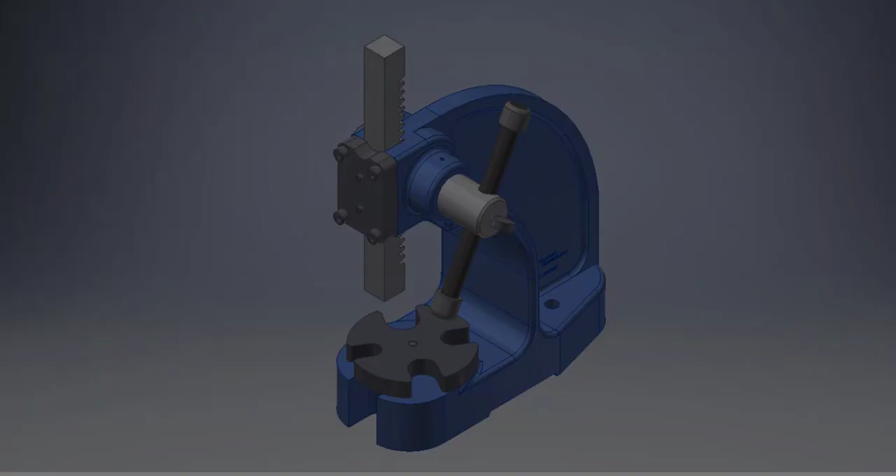In this video, I'm going to show you how to create this Arbor press assembly. I'm going to start out by going to your Canvas assignment and download these parts. Store them in your Documents folder. At the bottom is a sample of what you're going to submit to the assignment.

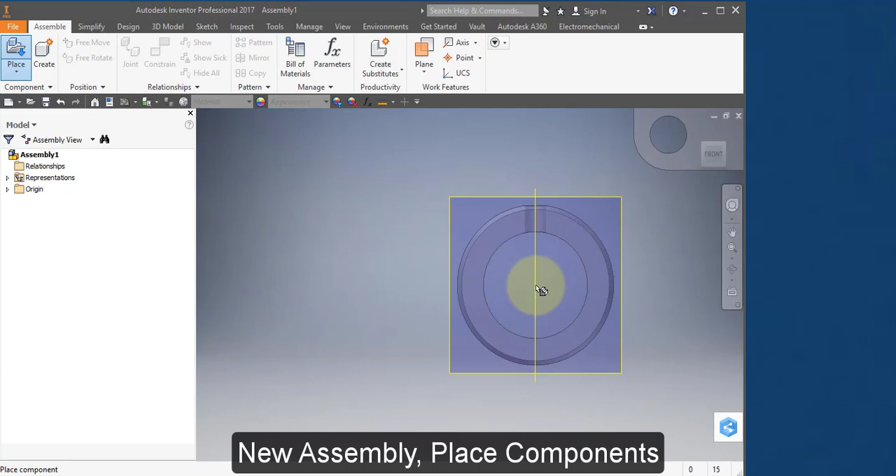Start out by creating a new assembly. Place your components. Go to the folder that you've stored the parts. You can hold your Shift key down and select multiple items. Open them. Select the location on the screen to place them. Right mouse button, OK.

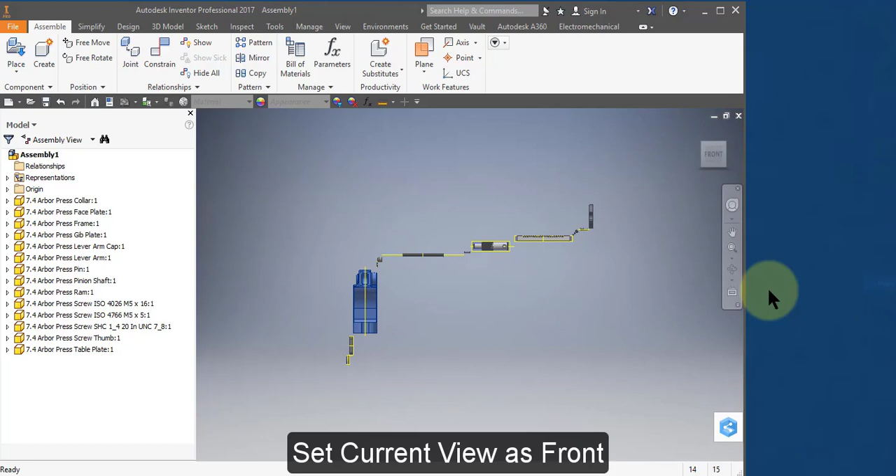Go to your front view. Rotate around such as this is your front view. Select your context menu. Right mouse button. Set current view as front. Select the frame. Hover over it. In your browser, right mouse button, Grounded, and you'll see a pin next to the part, and the frame is now grounded and can't be moved.

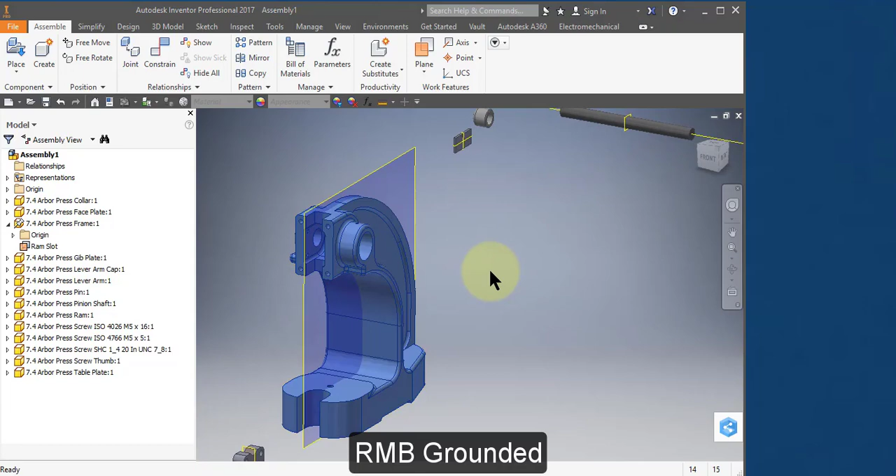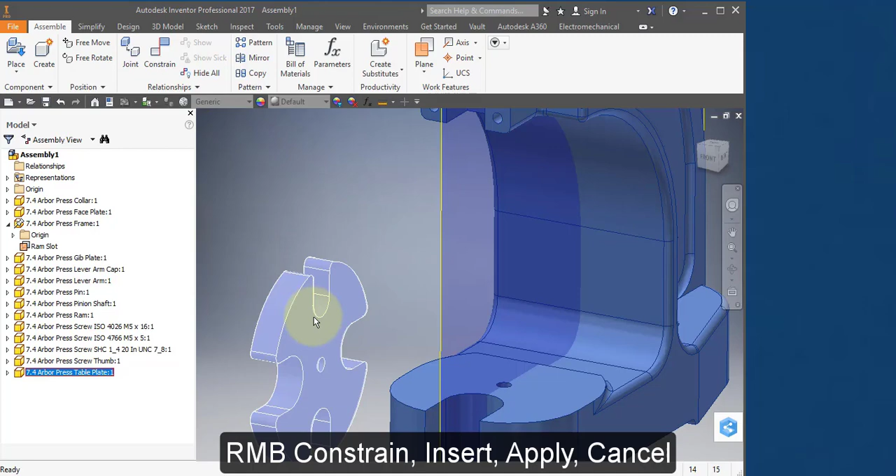Grab this plate and bring it closer to the frame. Select this part, the press table plate. Right mouse button, Constrain. Insert. Select this diameter and this diameter. Apply and cancel.

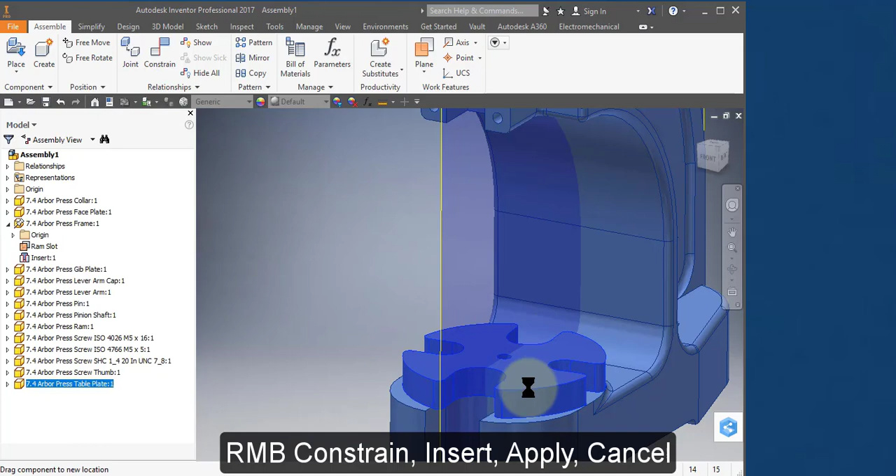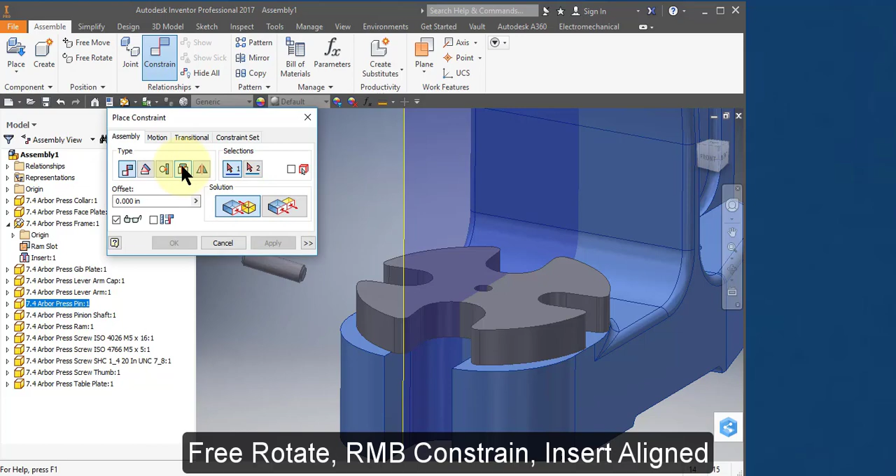Go to this part, this pin, and bring it closer to the assembly. Select the part, and then if you use free rotate, make sure it's the pin and not one of the screws. It should look like this. Select any place on the screen to let go of the part. Select the part, right mouse button, Constrain, and insert, and select this smaller diameter on the end and the hole here. Reverse the orientation by selecting here. Apply and cancel.

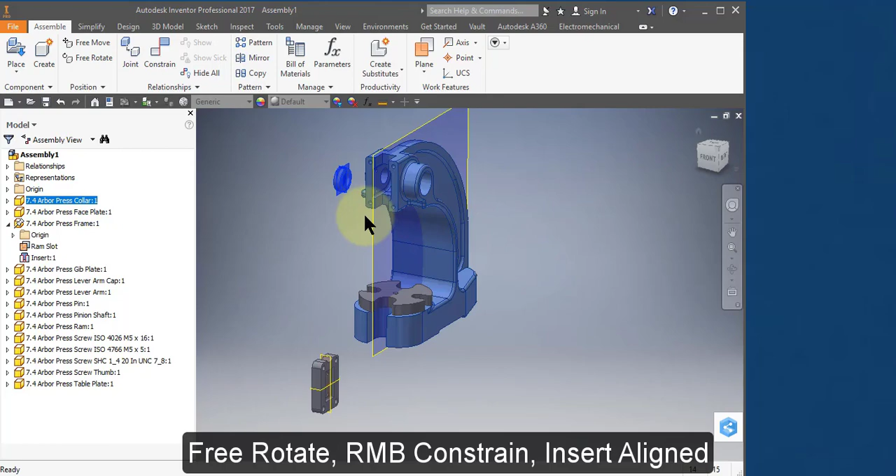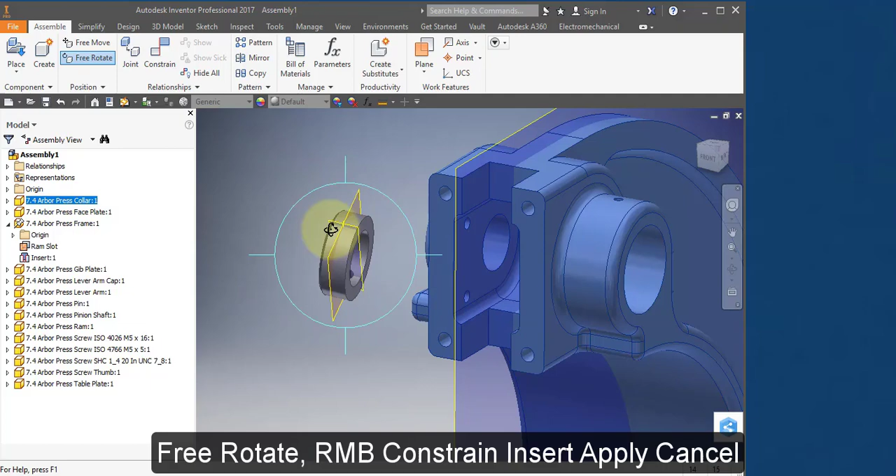Select this part and place it closer to the assembly. Select free rotate and rotate the part around. We want to orient it like this so that this surface is perfectly flat and the chamfer is on the far side. Select the part, right mouse button, Constrain, Insert, and select this diameter and this diameter. Apply and cancel.

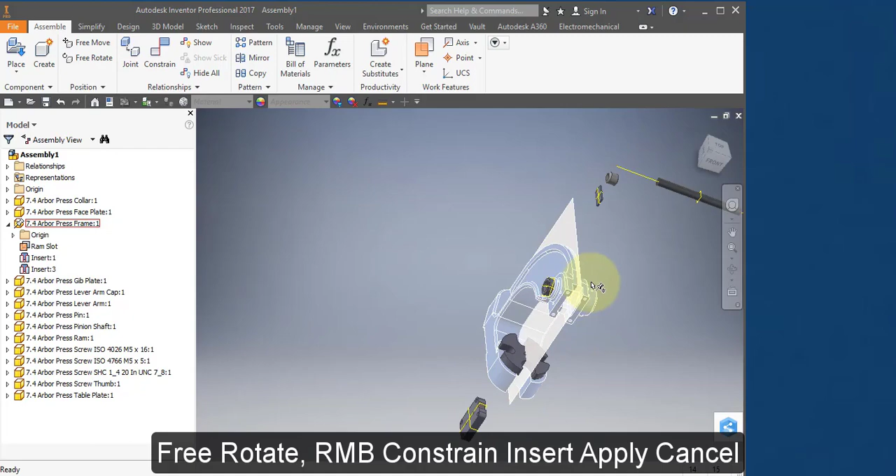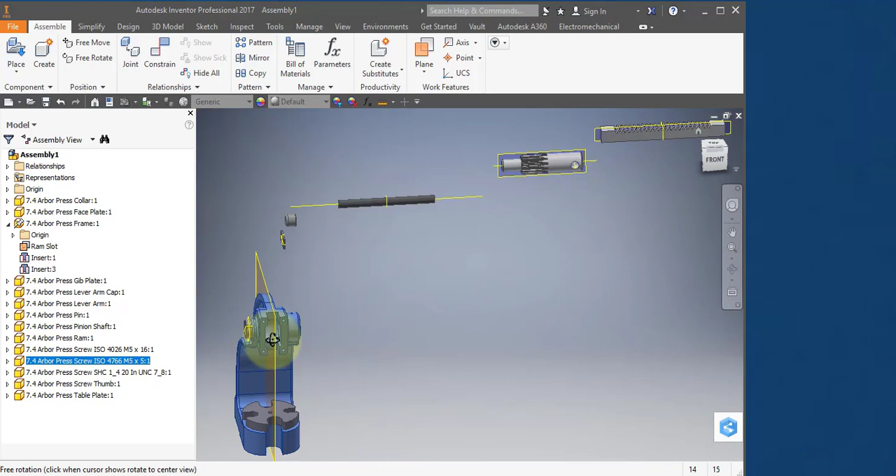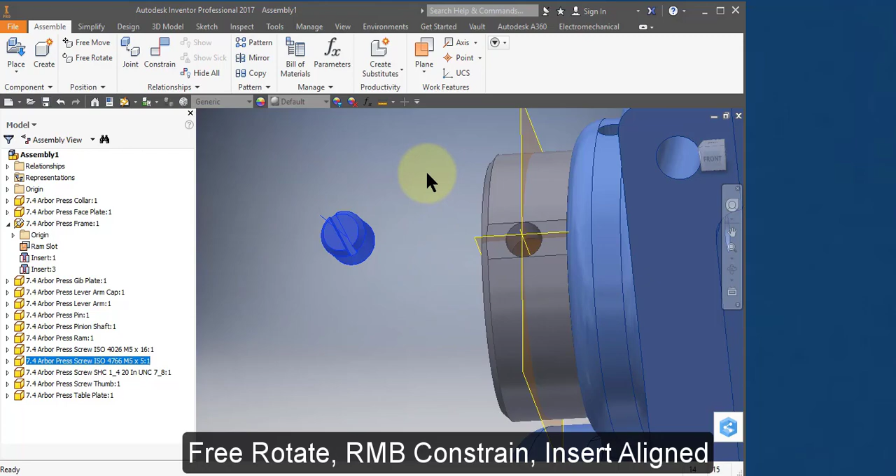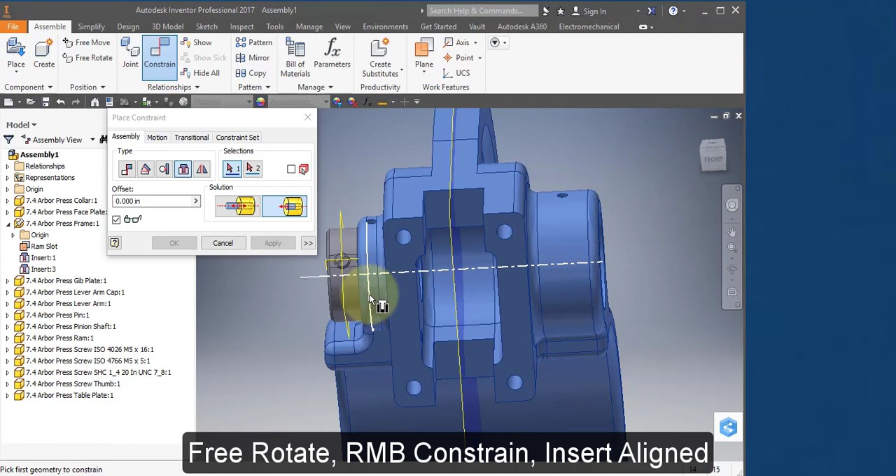Select this small part and bring it closer to the assembly. Select the part and select free rotate. Rotate the part around. Should look like this. Select, right mouse button, Constrain, Insert, and select this diameter and this diameter. Reorient the part, flip it, apply. Cancel.

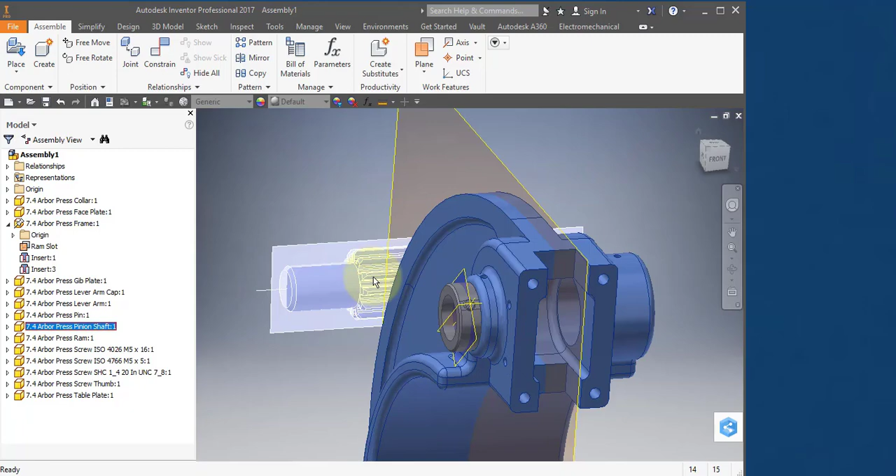Select this part and bring it closer to the assembly. Select this part, right mouse button, Constrain, and select Insert. Select this diameter and this diameter. Reverse the orientation and apply.

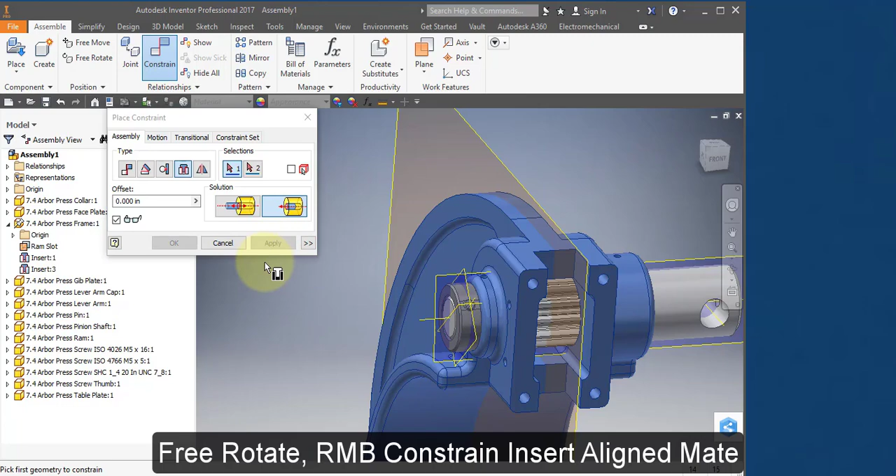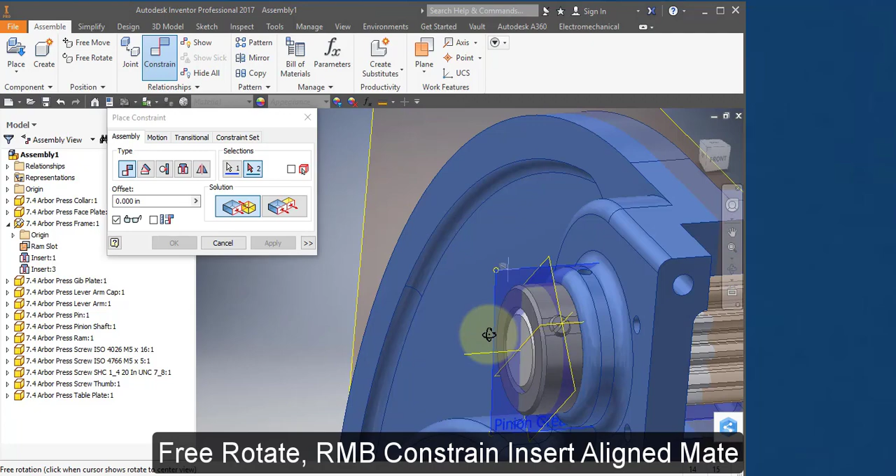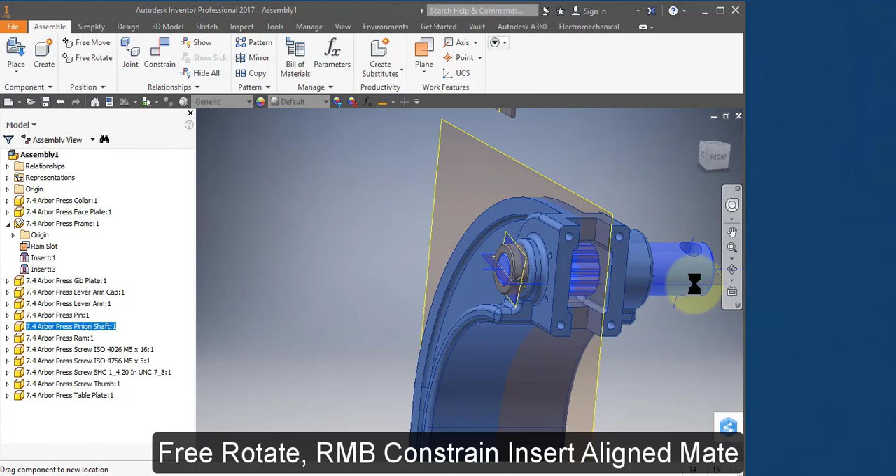Select Mate and select this work plane. It's on the pinion. And this matching work plane on the collar. And apply. And cancel. Now when you rotate the shaft, the pinion, the collar should rotate with it.

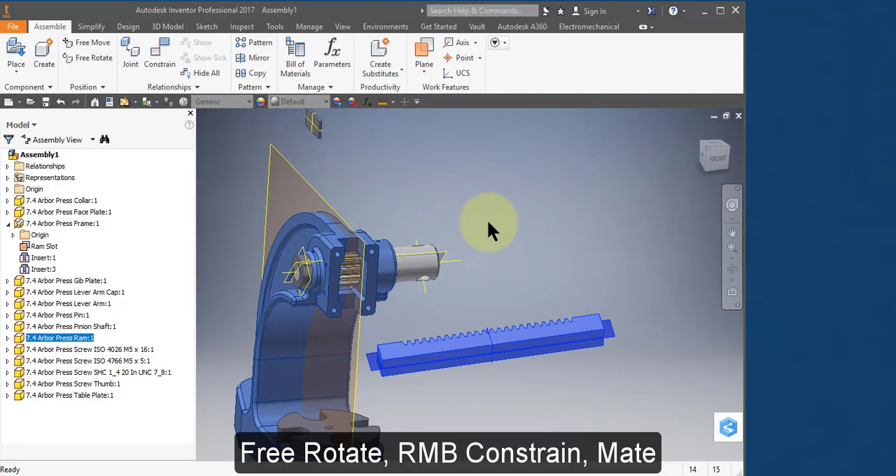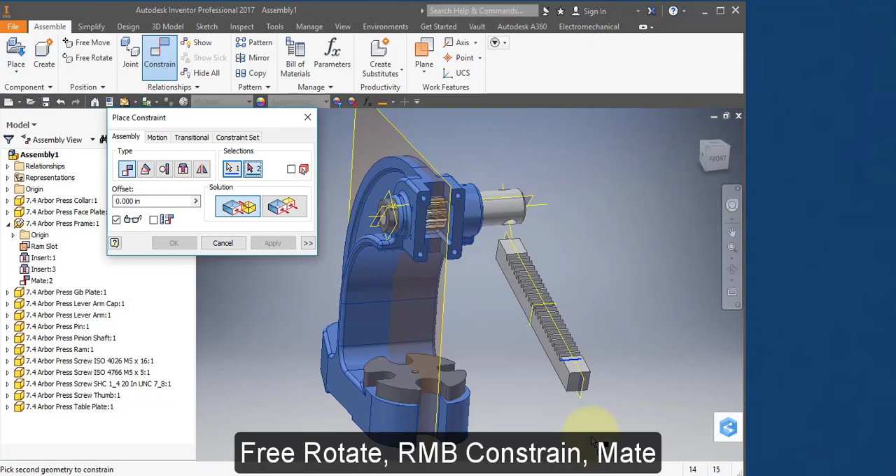Grab this part here, the ram. Select free rotate. Rotate the part around. Select Constrain. And select this work plane on the ram. And this work plane on the frame. Select Apply. And cancel.

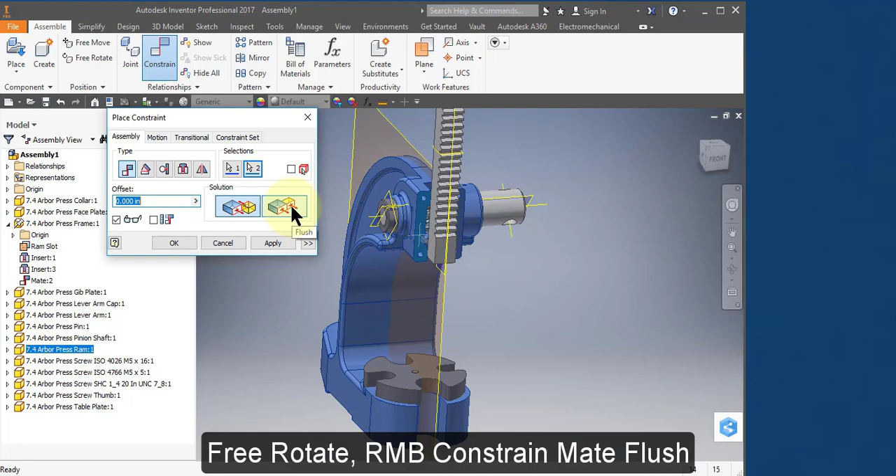Right mouse button, Constrain, and constrain this to this face. Make them flush and apply and cancel. Now you see the ram moves up and down in the slot. We'll look at my front view and then rotate around to my left side view and zoom in.

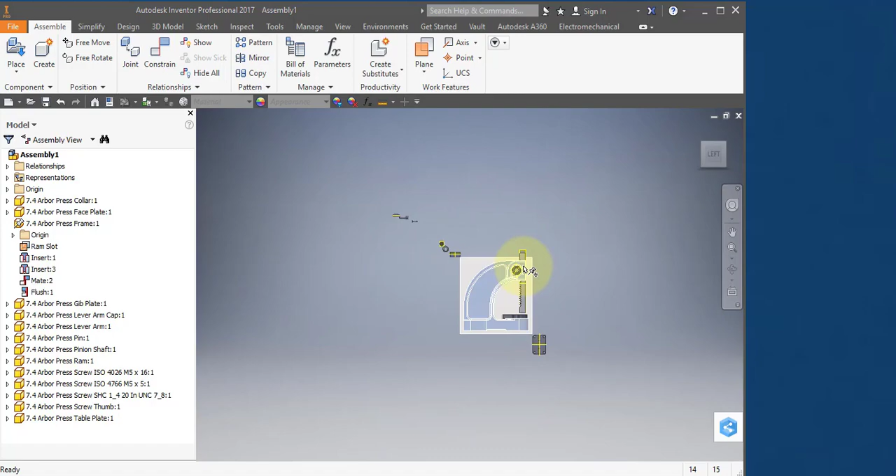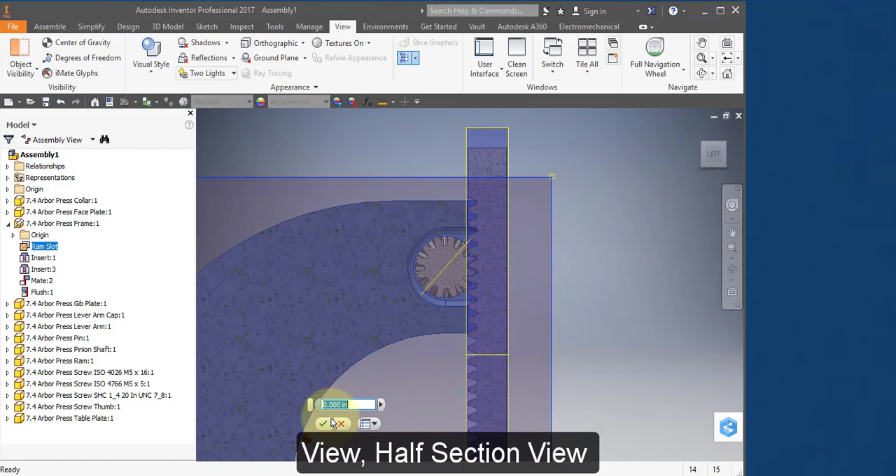I'm going to go to View, select this icon, select half section, and point to this work plane. And now I could select here, leave the offset at 0. And you can see the ram can move up and down, but it's not aligned with the gears. The gears, as a matter of fact, don't even move. I'm going to correct this so that when you move this ram, the gear rotates with it.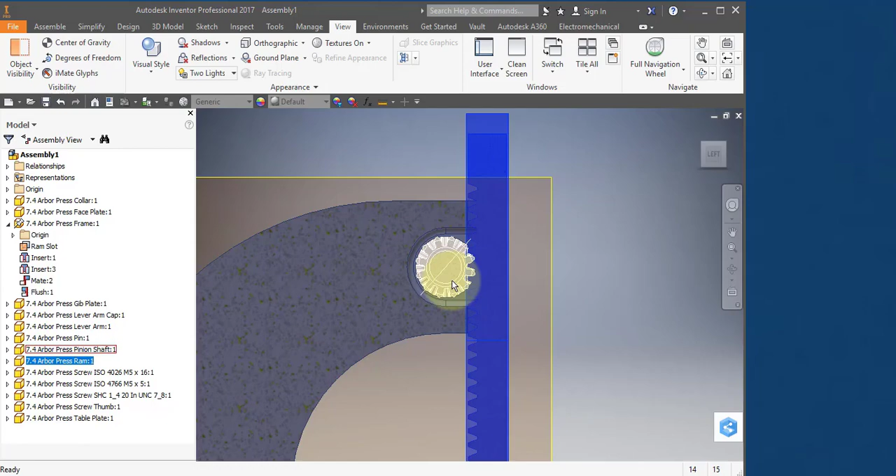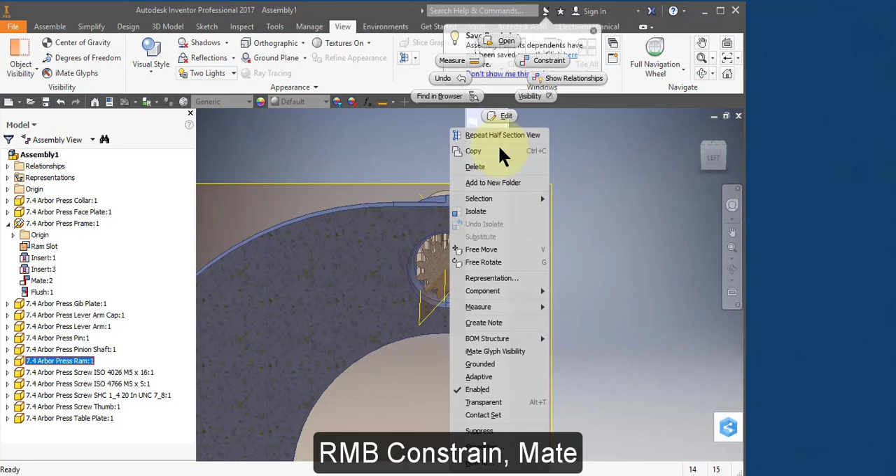First, I need to align so that the teeth on the ram align with the valleys on the gear. To do that, I'm going to align two work planes. I'm going to align this work plane on the ram and this work plane on the gear, on the pinion. So I'm going to select the ram and right mouse button, Constrain. And I'm going to use the Mate command, and I'm going to select this work plane and this work plane and apply and cancel.

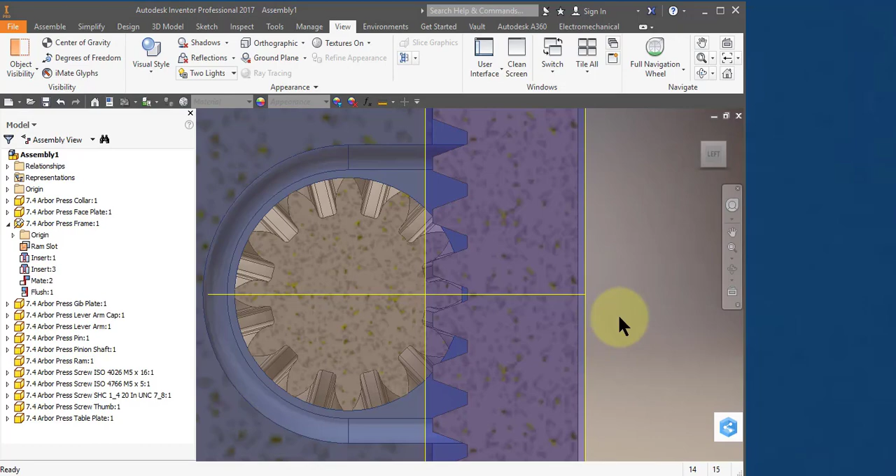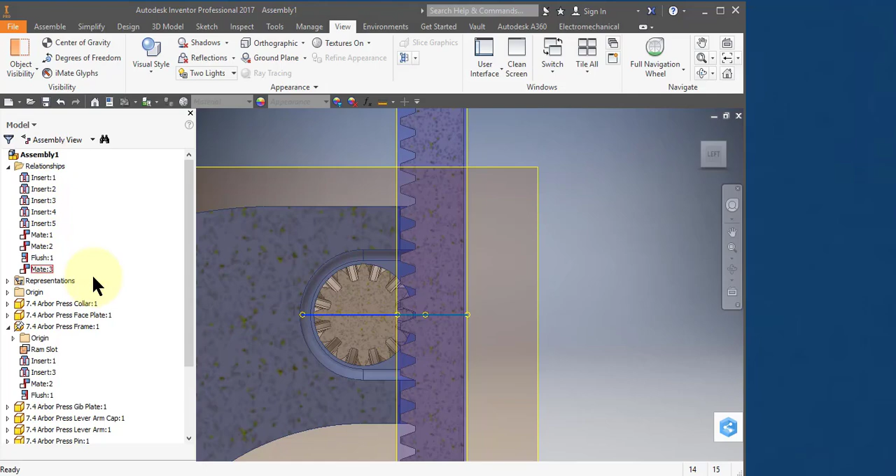And zoom in, and now you see that the gears are perfectly aligned. The teeth are meshed perfectly. This tooth is sitting right in the center of that valley. So I did that operation just to align them. What I'm going to do now is come to the most recent relationship I created. I'm going to open my relationships, and that one is this one here. You notice that when I highlight it, mate 3, these two work planes turn blue. So the gears are where I want them. I'm going to suppress this.

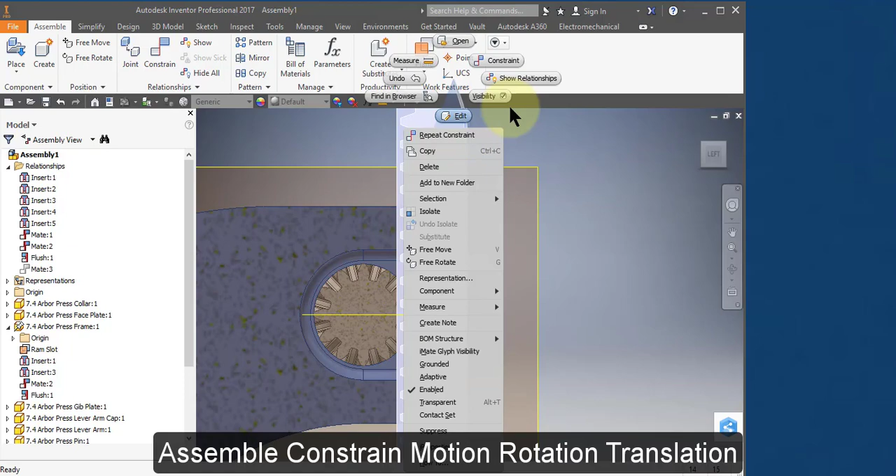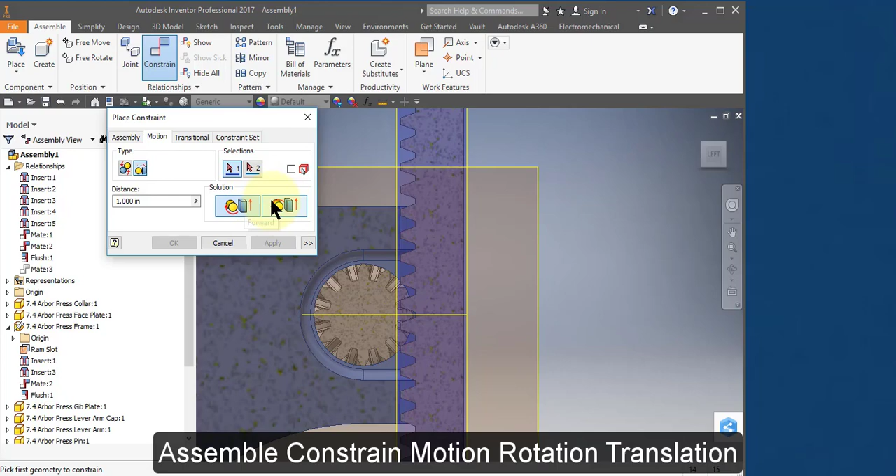I'm going to create a new constraint. Go back to Assemble. I'm going to select one of the two parts. I'll select the ram and Constrain. I'm going to select Motion tab, and I'm going to select this option, Rotation Translation. I'm not using two gears. I'm using a gear and a flat surface like this. And I'm going to select this option because when these are gears, and when one rotates in one direction, the other one's going to rotate in the opposite direction. So I'm going to select this option.

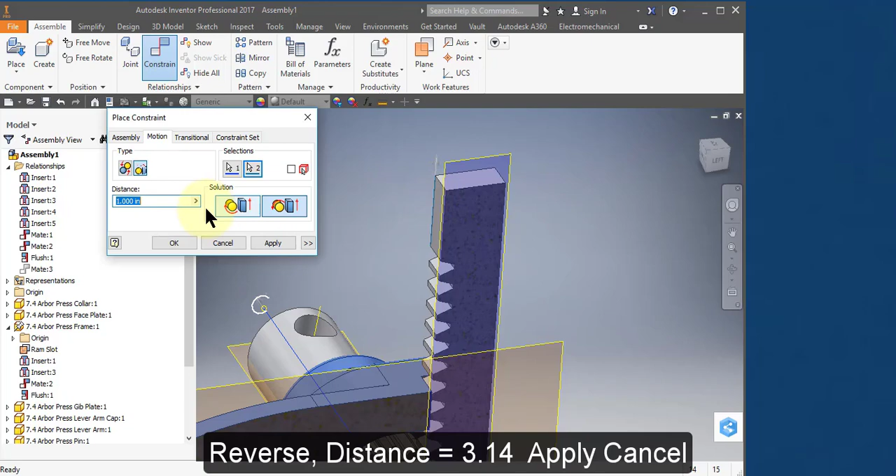And I'm going to select the axis of the gear. And then I'm going to select this edge, an edge that's pointing vertically on the ram. I'm going to select this edge here. I could select any edge, but this one's the most visible. And the distance. So I'm going to set this to 3.14.

That's the parameter pi. And why am I using pi? This is a 1-inch gear, and what I'm trying to calculate is the circumference of this gear, and the circumference is 2 pi r, or d times pi. D, the diameter, is 1, so it's 1 times pi, or pi. So when this rotates one rotation, this ram will move 3.14 inches. I'm going to select Apply and then Cancel.

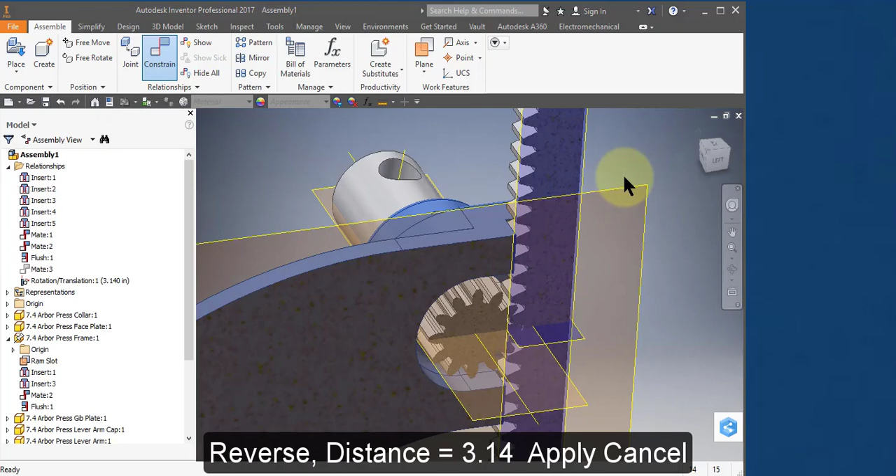And notice when I move the ram up, the gear rotates and they're perfectly synchronized and meshed. I'm going to go back to View and go back to this icon and end my section view.

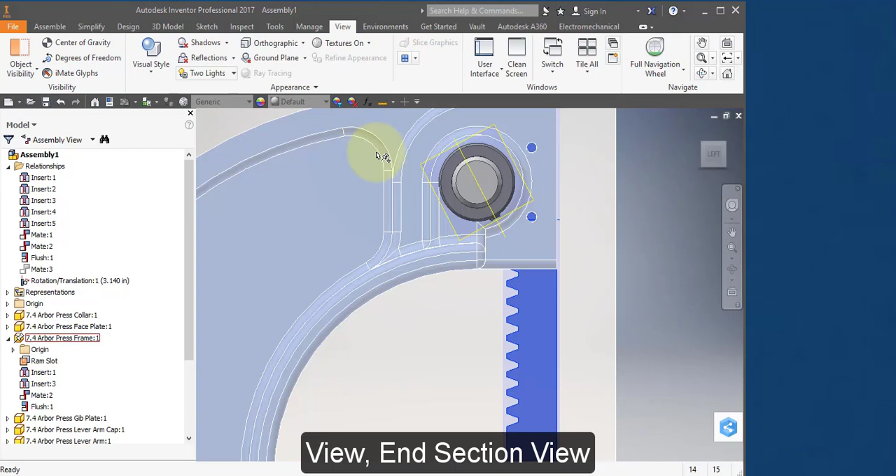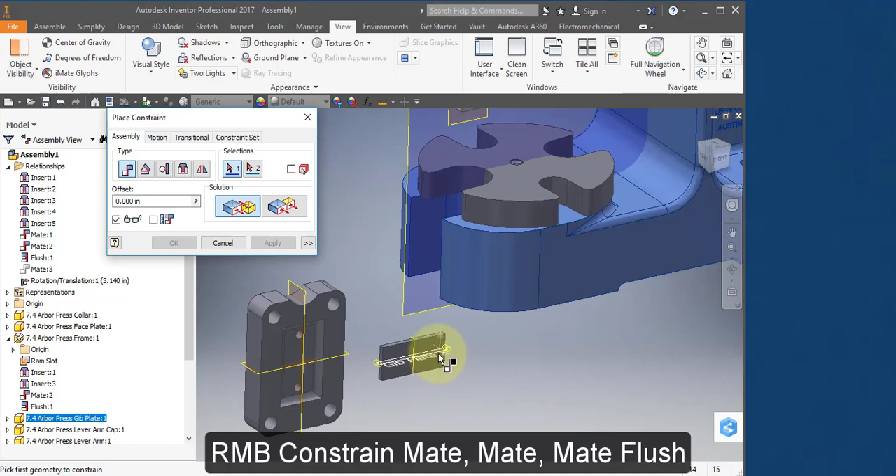I'm going to grab this part. It's the gib plate. I'm going to bring it over here close to my faceplate. I'm going to select this, right mouse button, Constrain, and I'm going to constrain this work plane to this work plane. Apply. And then I'm going to constrain this work plane to this work plane. Apply.

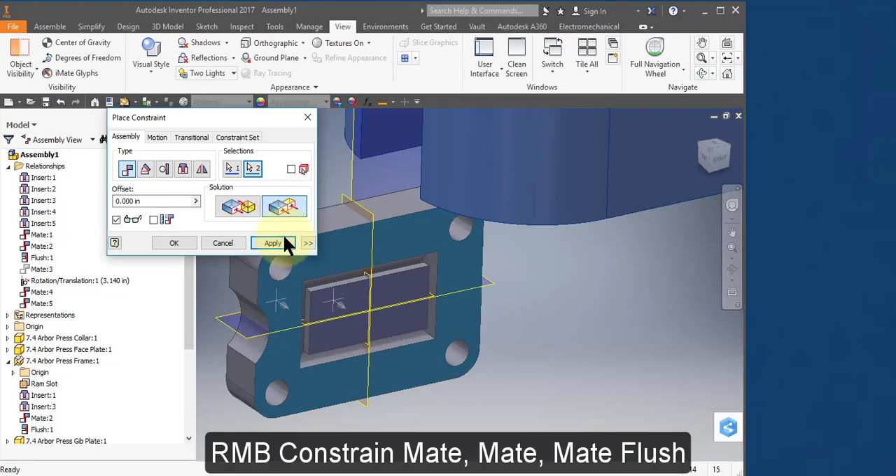And then I'm going to align this surface to this surface. And I want it flush. Apply. And cancel. And your assembly should look like this. It should be flush like this.

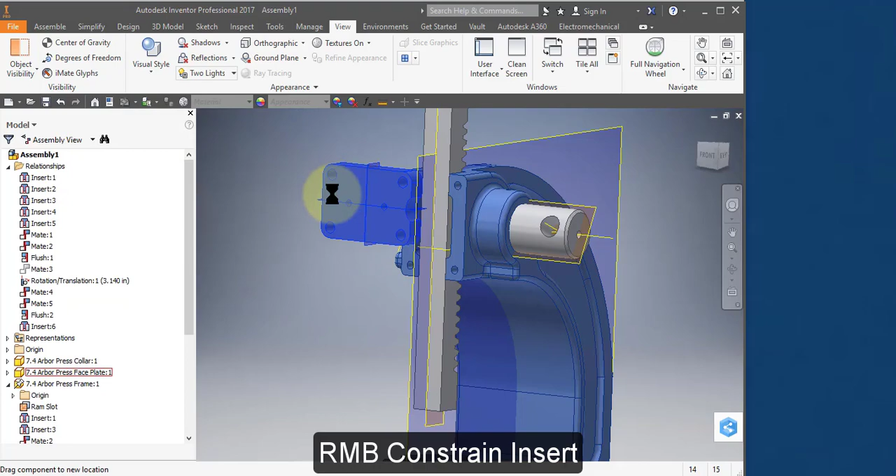I'm going to mate this surface to this surface here with this curved feature facing up. Let's select this part, right mouse button, Constrain. Going to Insert, select this diameter and that diameter. Select Apply and Cancel. Rotate this part around.

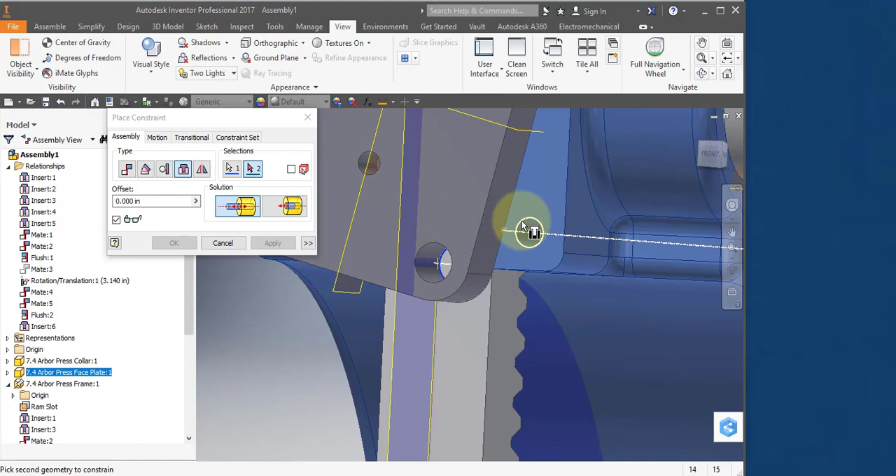Select this part again, right mouse button, Constrain, and select this far diameter. Select Insert and select this diameter here and this diameter here, and apply and cancel.

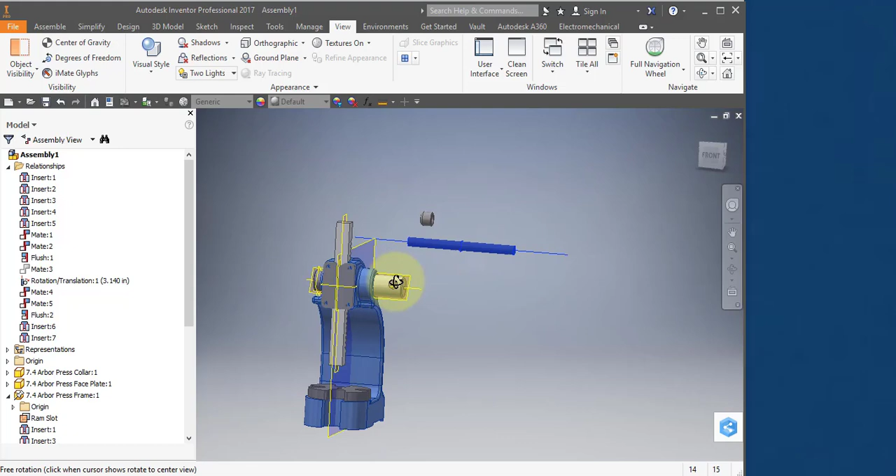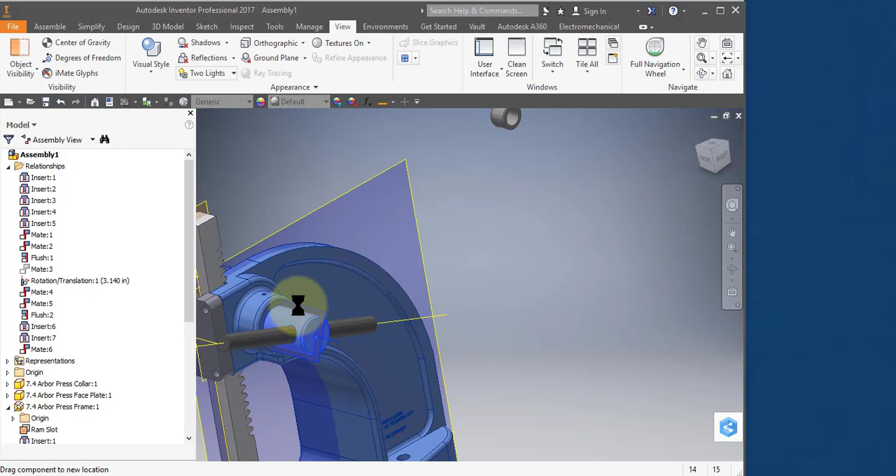Let's select this shaft, the arm, right mouse button, constrain, and select this axis and this axis. Apply and cancel, and slide this into the hole, approximately centered. Select this part, go back to assembly, free rotate and rotate the part around slightly.

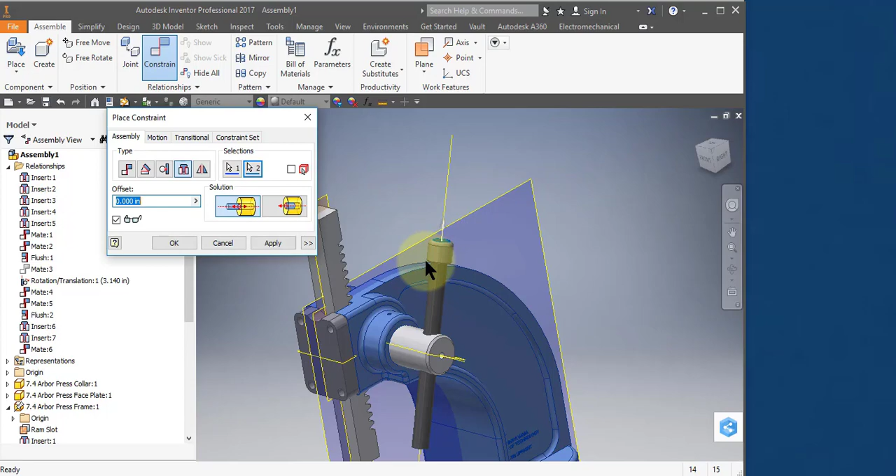Select the part again, right mouse button, constrain, insert, and select this diameter and this diameter, and apply and cancel. Go down to the bottom of your browser and find this part. You can highlight it, and you notice it's right here. I want a second one for the other end of the arm. I'm going to grab it and just drag it out here onto the window.

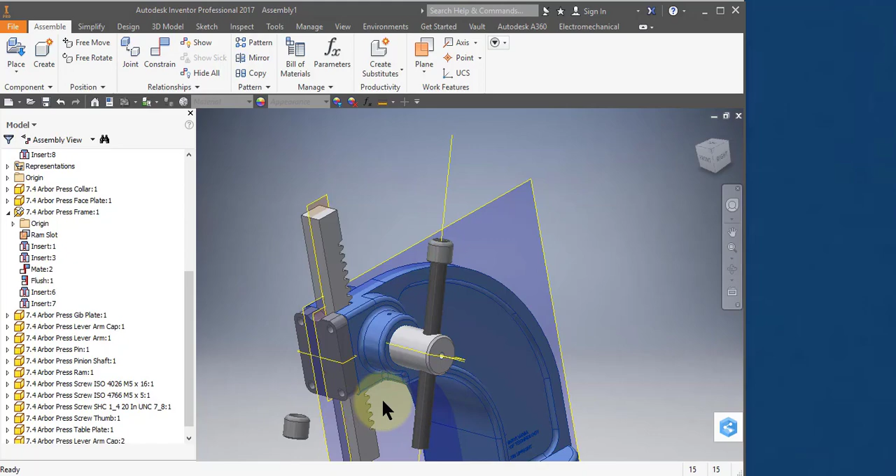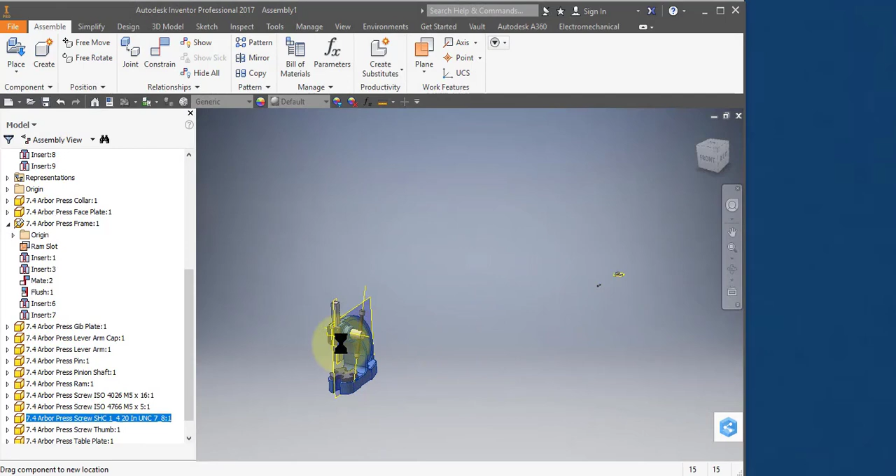I'm going to do the same thing again. Highlight it, right mouse button, constrain, insert, and select this diameter and this diameter. Apply and cancel. I'm going to bring these parts a little bit closer. 3 more parts.

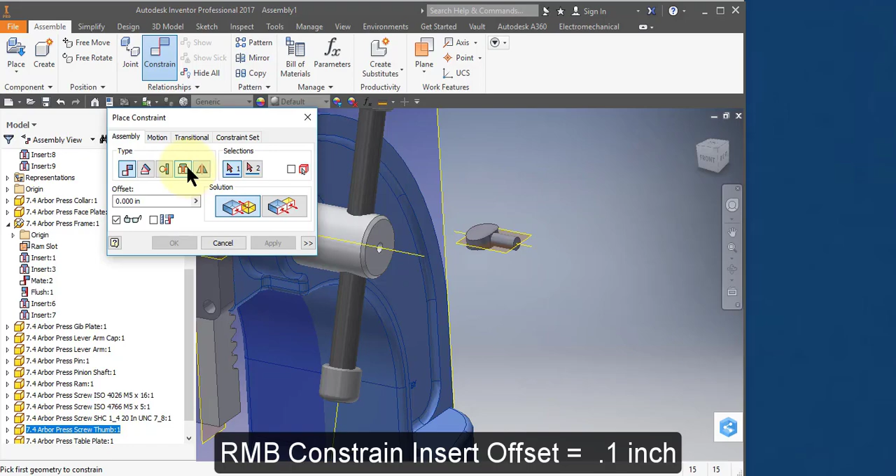I'll select this part, right mouse button, constrain, insert. I'm going to zoom in here. I want to select this diameter and this diameter, but if you notice it's right up against it flush. I want it offset a bit. I'm just going to set it off 0.1 inches. And you notice now it's backed off slightly. Select apply. Now I want to do a mate command.

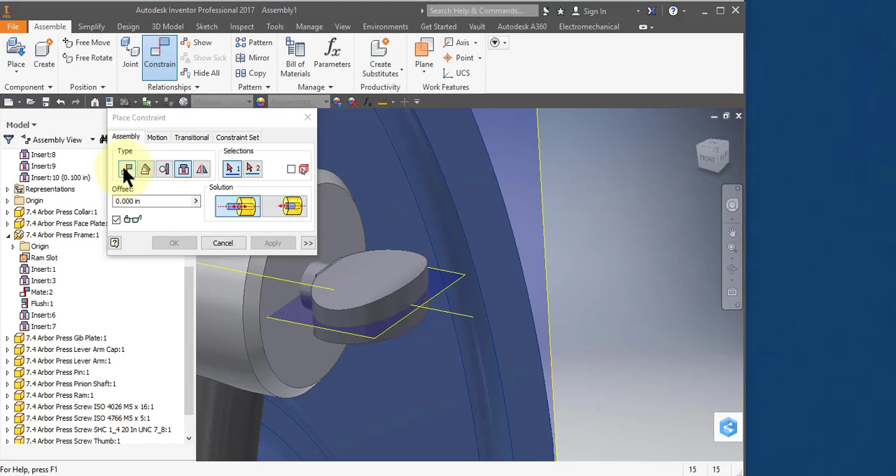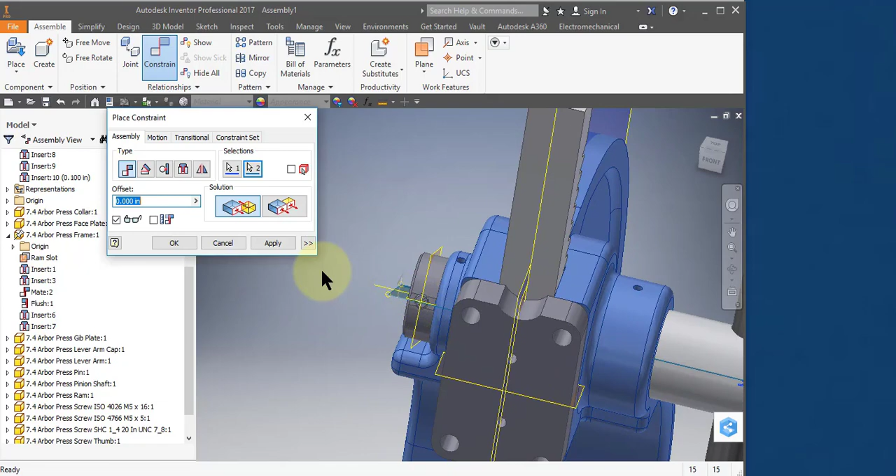I want to mate this work plane on the thumb screw with the work plane on the pinion so that they move around together. Let's select it here. Apply. And cancel. Now you notice when I rotate this pinion, the arm rotates. Also the thumb screw, the collar, they all rotate and the ram goes up and down.

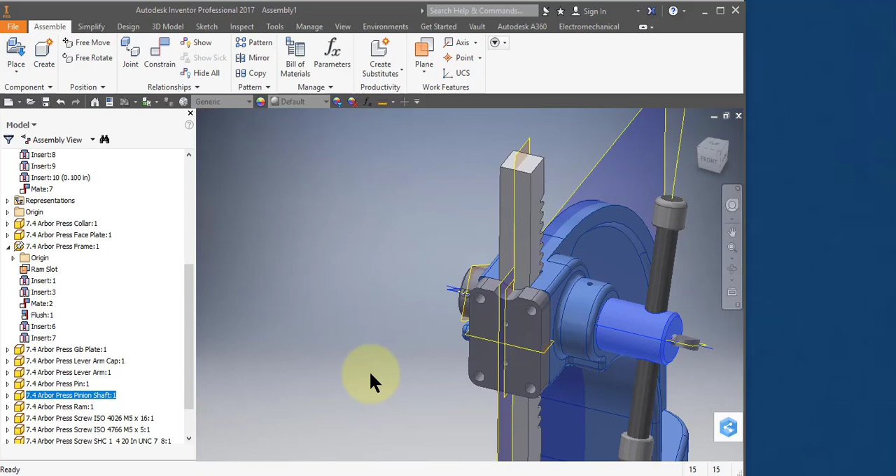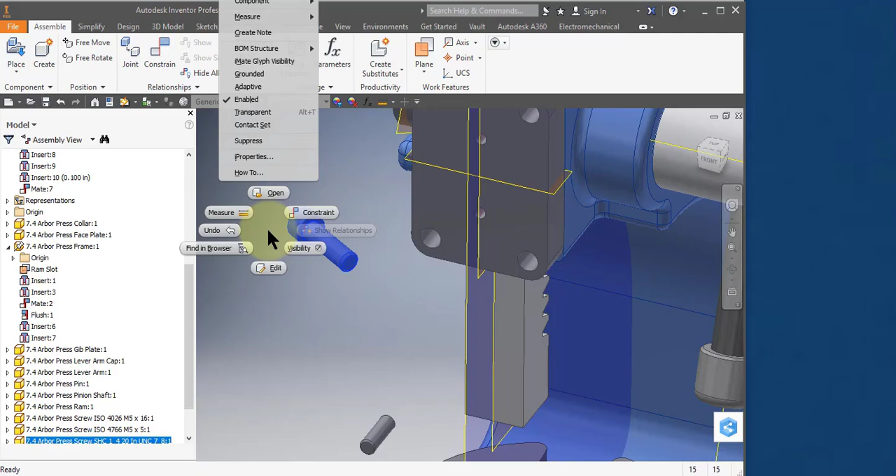I'll select this part, bring it up a little bit, select free rotate, rotate it around. Select anywhere to release it. Select the part and right mouse button, constrain, and do insert. Select insert and select this diameter here. And this diameter here. Apply and cancel.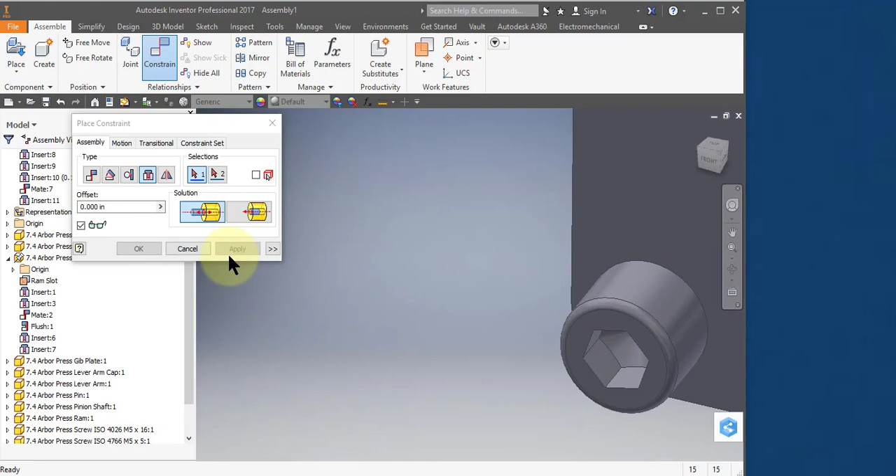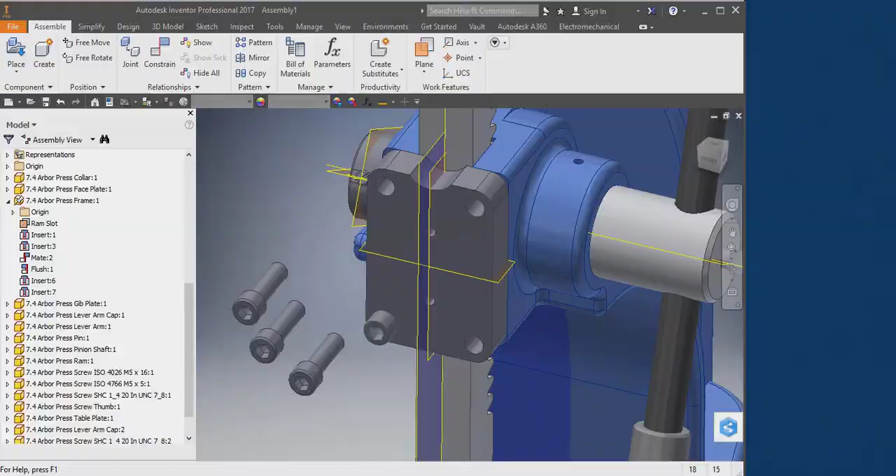What I'm going to do is select the part, and you notice this one here is highlighted in blue. I'm going to drag over 3 more parts. And I'll leave it to you to place these 3 parts into the holes. I've placed the other three.

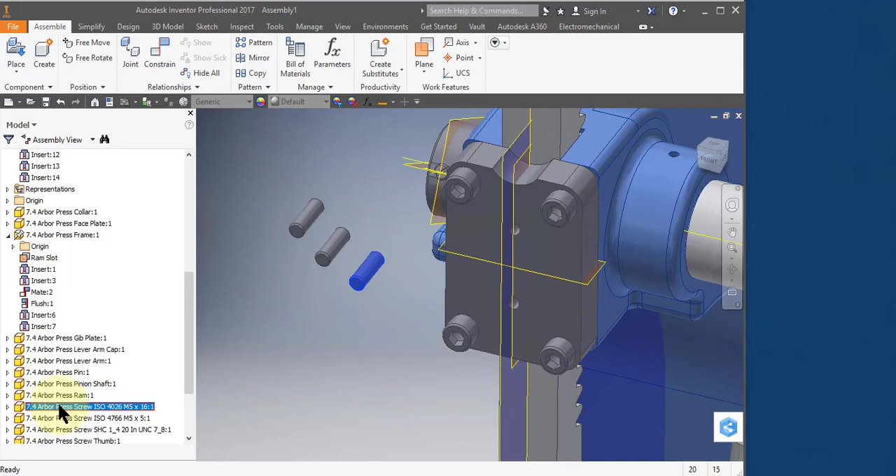Bring this part up, zoom in, and there's a total of 4 of these parts. Notice that once I have it highlighted here, it's highlighted in blue here. So I'm going to bring around 3 more. Select the first one and free rotate, bring it around. The hex recess should be pointing out.

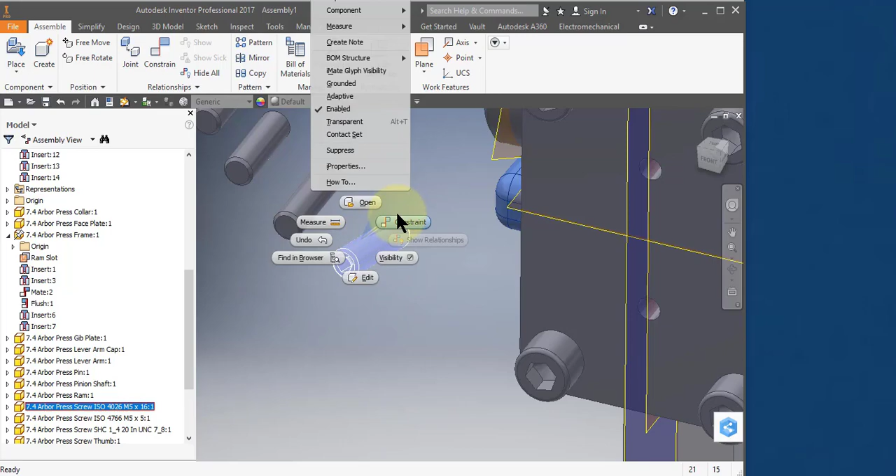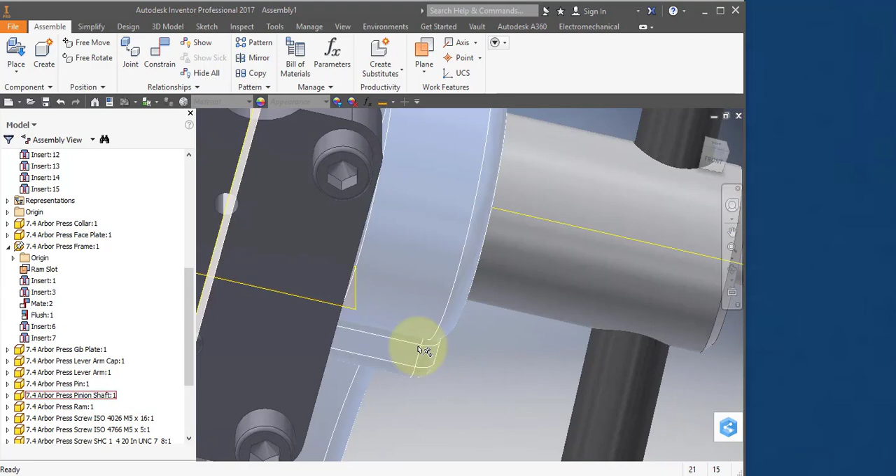Right mouse button, constrain, insert, select that diameter and this diameter, reverse it, apply, and cancel. Now there's 3 more mounting locations. This hole here, and these 2 holes here. I'll leave those 3 locations for you to place.

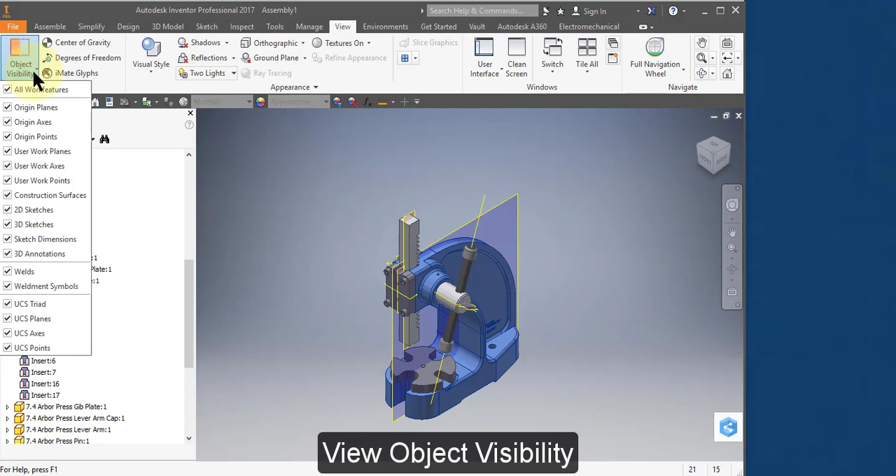So now I've placed all the screws. I'm going to go to View, Object Visibility, and if you want, you could turn off your user axis and your user work planes. Position your ram in approximately this location and your arm in approximately this location. Go to File, Export to PDF. Store the PDF in your Documents folder and you could submit it to the assignment.

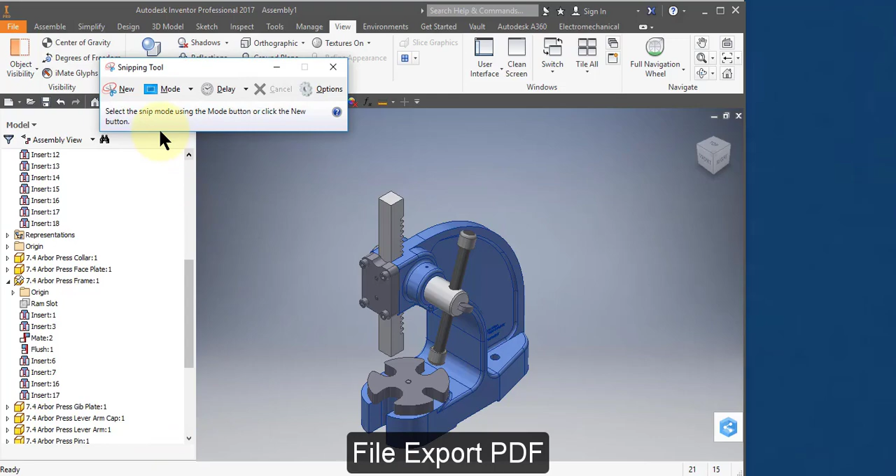Alternatively, you can use your Snipping Tool. Take a screen capture of your assembly. Save your snip as a JPEG or PNG, and alternatively, you could submit this to Canvas to complete your assignment.